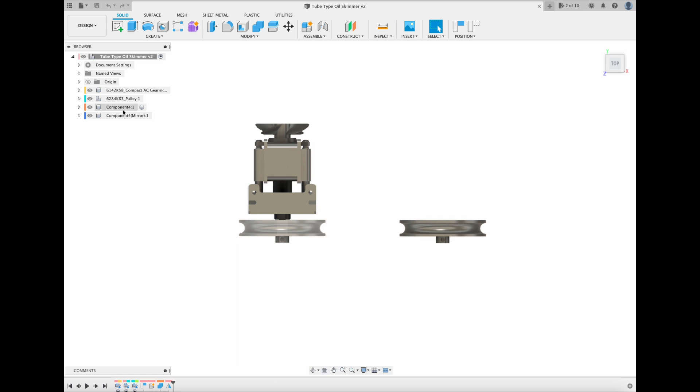I'm now going to make the mounting plate. Using the move command that you see up there in the top of the toolbar or the ribbon. There, I'm moving it into place where I want it. Wow. And it's a good idea to save your work as you go.

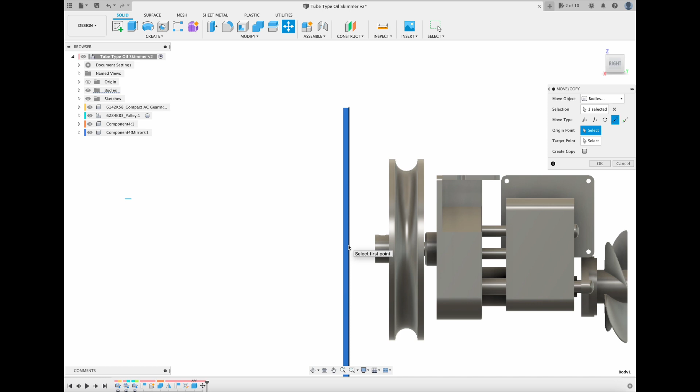Great thing about Fusion 360, you can drag and drop parts from McMaster-Carr.com, so you don't have to 3D model every single nut, bolt, screw, washer, etc. Wow. So you can see this shaft. I went on McMaster-Carr's website and basically downloaded the 3D CAD file from McMaster-Carr.com, and there's my shaft for my pulley. And then I can manipulate it in Fusion 360.

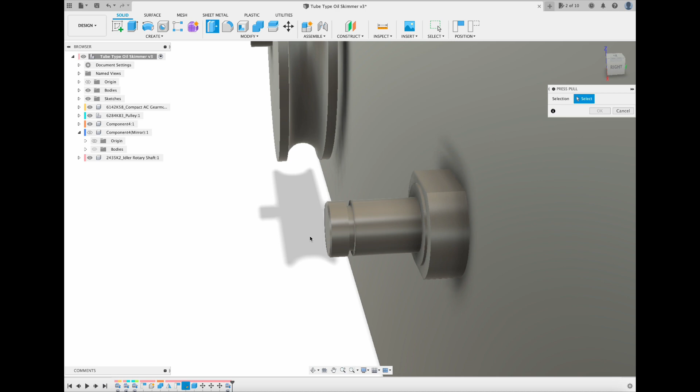So then in the render mode, we can add paint colors. I'm going to paint the different components different colors so they stand out better on screen. You can see that hole there is where a set screw would go.

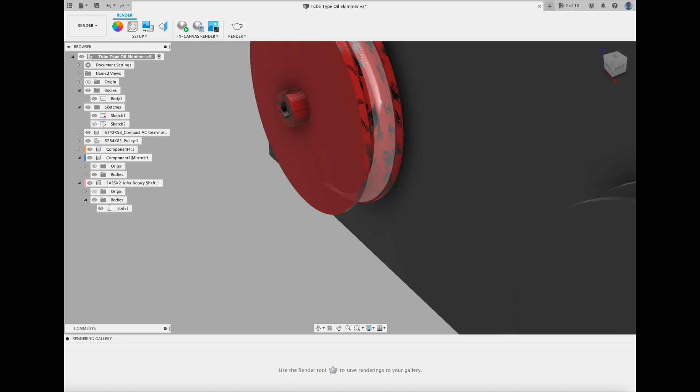Again, if you go up to that insert box, that drop-down menu has a direct link to McMaster-Carr, takes you right to McMaster-Carr's website. You can type in the search box whatever part you're trying to find, nut, bolt, washer, pulley, etc. So I found that really helps speed up my workflow when I'm 3D modeling a product.

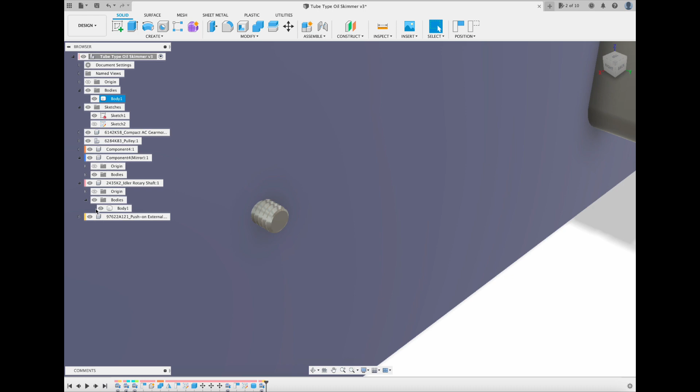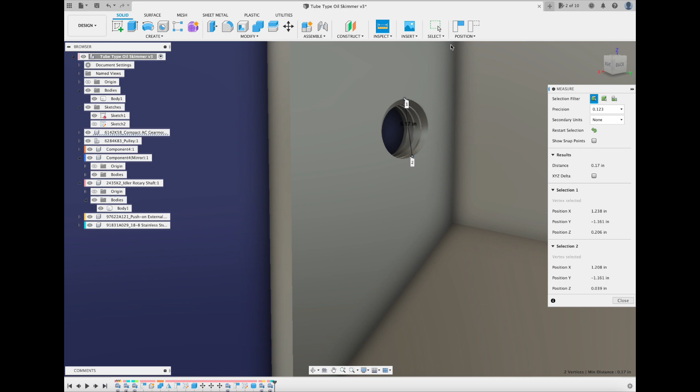You see, I add a retaining clip. I added a lock nut. Now I'm going to measure these holes and add some mounting bolts for that motor. And the hex bolts didn't work, so I'm going to use some cap head screws, some Allen bolts basically. Because it's tight tolerance on that motor mounting flange there.

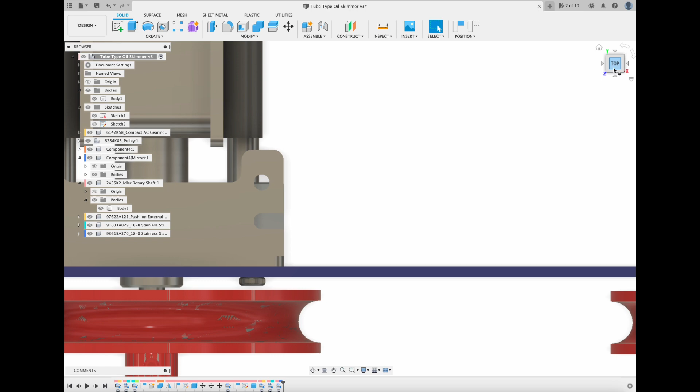And the great thing, once I drag and drop in one bolt from McMaster-Carr's website, I can use the mirror command to make 3 more bolts, or I can use the copy command to make 3 more bolts. And here's a better view of the drop-down menu. So you can see here, I made a copy of it.

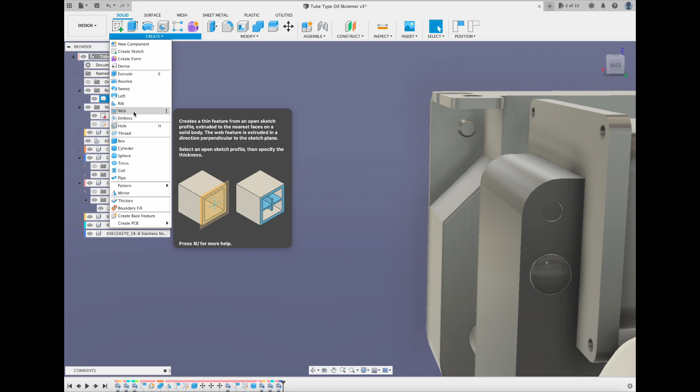I want to make a cover for this motor, so I simply hit the sketch command and made a sketch on the back of that mounting plate, drew a square, and then extruded the square out to the size I want. And I'm making another sketch on that plate that I just made, and I'll go up and use the extrude command on this to extrude it out to the size I want. You can see there's different options you have up here in the ribbon.

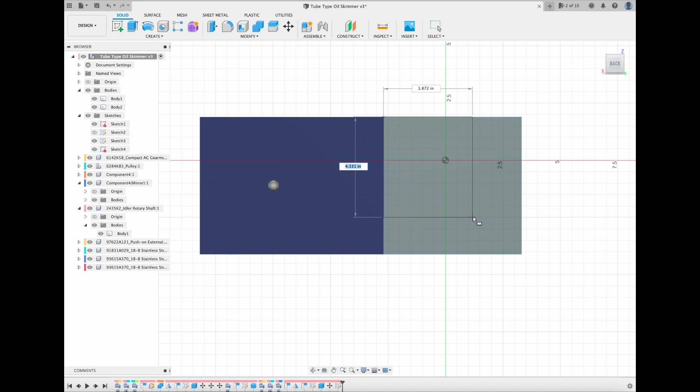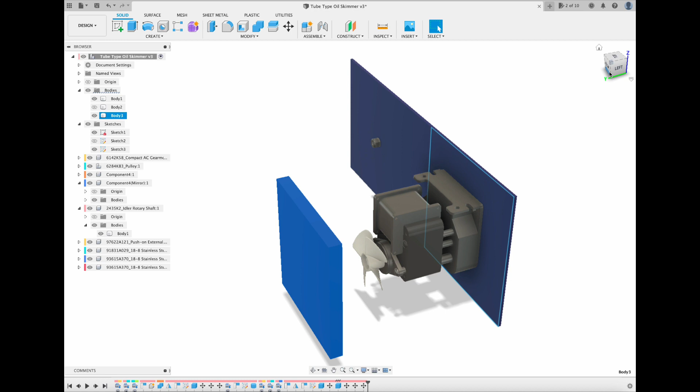The shell command is great. I'm going to use the shell command in a minute here to turn this solid 3D object into a shell, so it'll provide the cover for the motor. Woo! You can see I'm playing with the shell feature there.

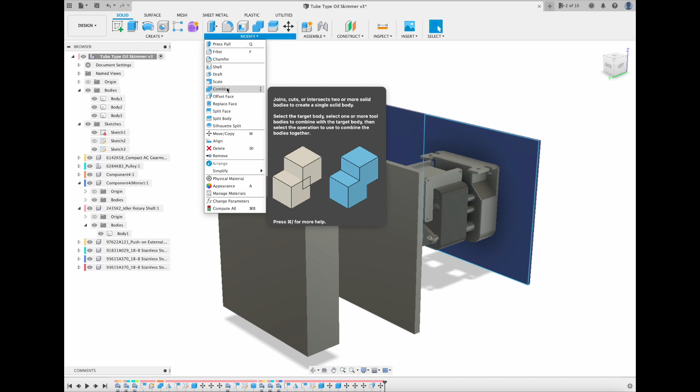Or you can drill a hole if you want a round hole instead of a square hole. But in this application, I do need it to be square. It needs to be a cube that's hollow. And I want the walls to be 1/8 inch thick. And there you go. There's the cover. Wow. And then I'm going to make a flange, a mounting flange, that'll weld to that motor cover. And then the mounting flange itself is going to be what bolts to the mounting plate.

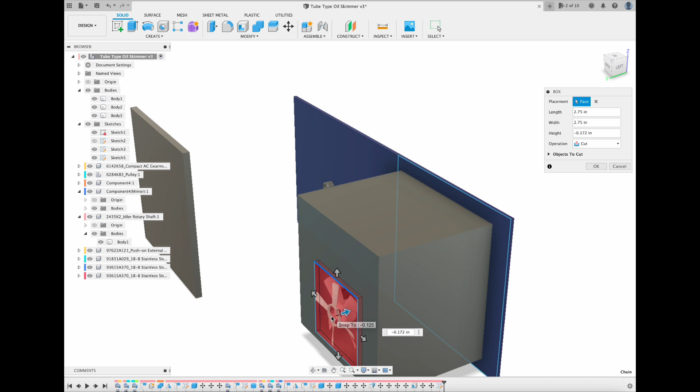And I want to add a weatherproof vent on the back of it. So I'm going to try some different size louvers, different vents from McMaster-Carr's website to see what fits good. So that way when it rains or they wash down the wash rack, you don't have to worry about getting water sprayed inside that electric gear motor.

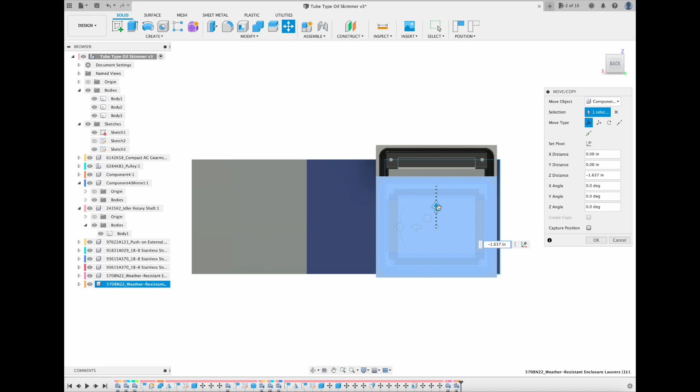And you can see you can rotate objects 360 degrees, move them up and down, left and right, get them where you want them, rotate them. I tried several different ones to see which one would work best.

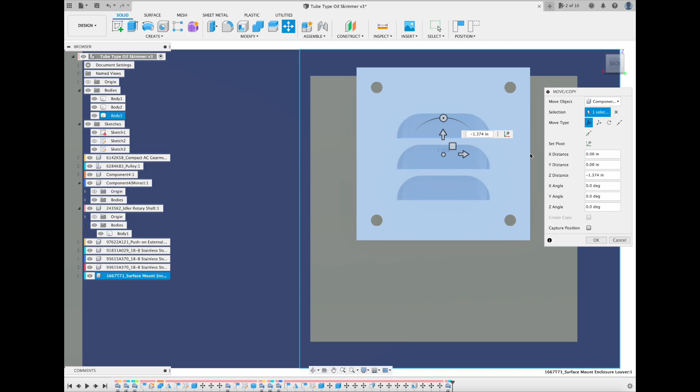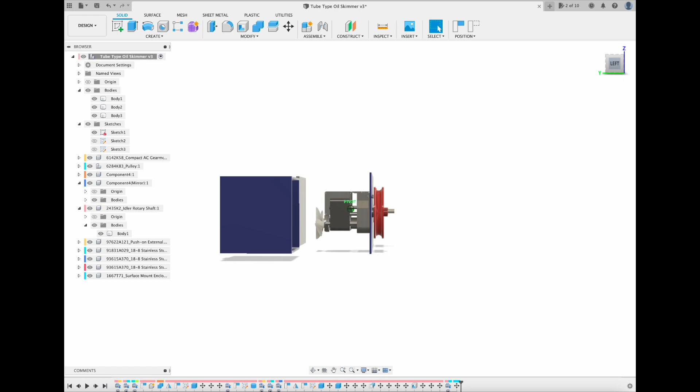And later on in this demonstration, I'll show you where I add some holes to the bottom of this motor cover box, so that way the cooling fan on the motor will suck air in on the backside, and then the warm air can be forced out some holes that I'm going to drill in the bottom of the cover. So I'm working on making an actual opening for the vent.

Now when you're 3D modeling, it's up to you how detailed you want to get. If it's just for looks, where you just want to capture the exterior look of the product, then you don't have to go through every detail of every single mounting hole, cutting out the opening like I did for the vent. Depends on your time constraints, your budget, what you're trying to accomplish.

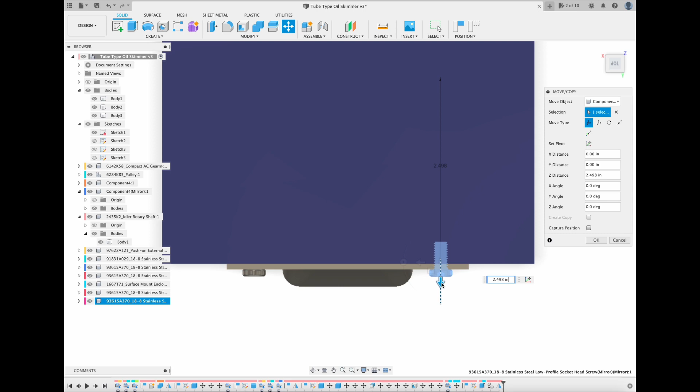And then again, using that extrude command, I did a cut. That's why you see that it turned red, and I removed material to make that flange. Woo!

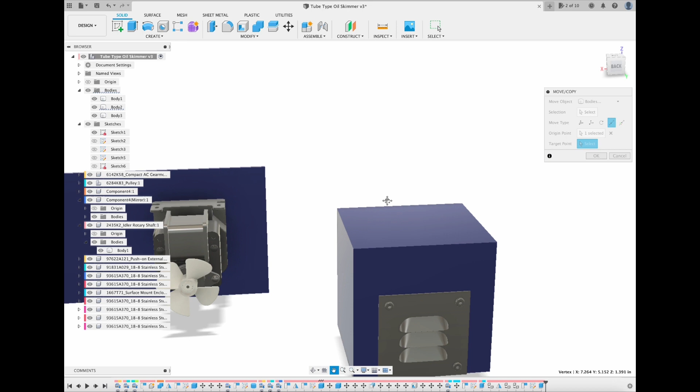And then up there in the design tab, you pull that menu down, and that's where you can go in. You can add color. And the render, got to click on render.

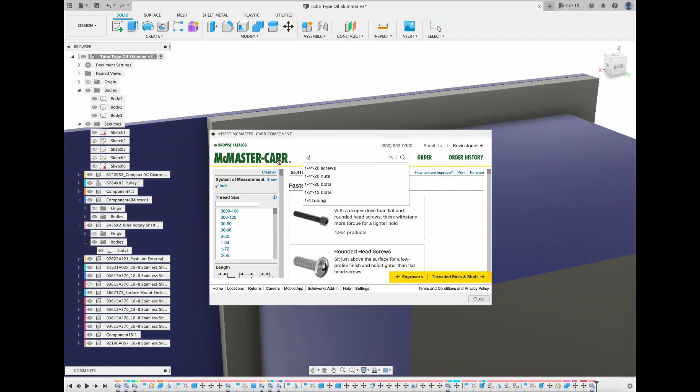So here again, I'm bringing in more parts from McMaster-Carr's website. Get some cap screws to mount this cover to that center plate, that mounting plate. And I would like 4 of these mounting screws, 1 on each corner. I'm happy with that.

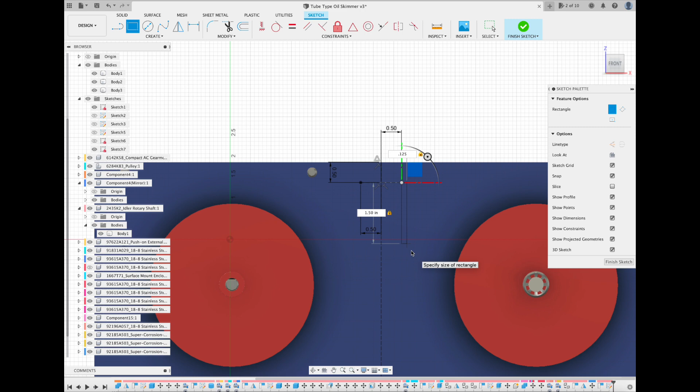And the great thing about that sketch command is you could pretty much draw a sketch on any plane, any face. You can draw hidden lines. So now I'm adding the scrapers where I want them on that mounting plate. The scrapers are going to be what scrapes the oil off the tube as it's pulled through the unit. So you did an extrude feature there, remove material.

So that's a top scraper. Need to make a bottom scraper. I'm simply going to make a copy. They're going to be offset from each other. So those two scrapers are what's going to, again, scrape the oil off of the tube as it travels through these rollers.

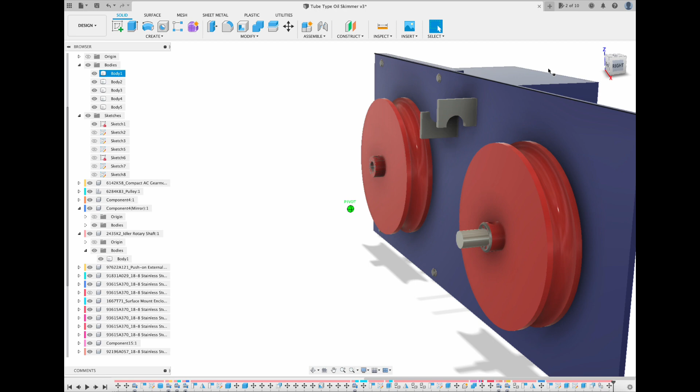And elongate these shafts and then move the pulleys out because I need to put some gears behind them. Specifically, I need a drive gear on the motor shaft. So I'm going to go to McMaster-Carr, find the gear I want, bring it in. It's an SAT file. So again, you can see I'm just going to manipulate these parts to get them aligned exactly where I want them to be.

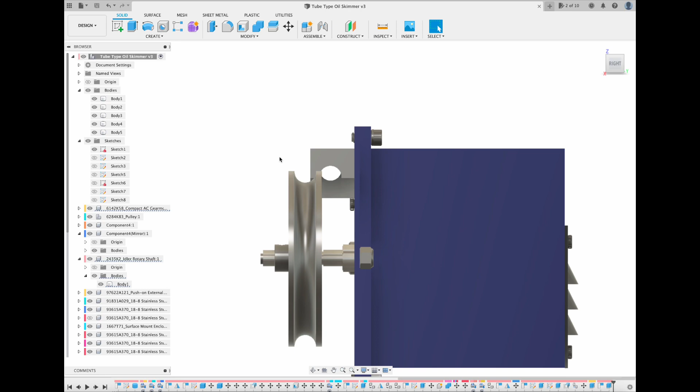Tried a few other gears that I wasn't happy with, so I'm going to stick with these gears that you see here. Just making sure my pulleys stay lined up and my tube scrapers stay lined up with the pulleys.

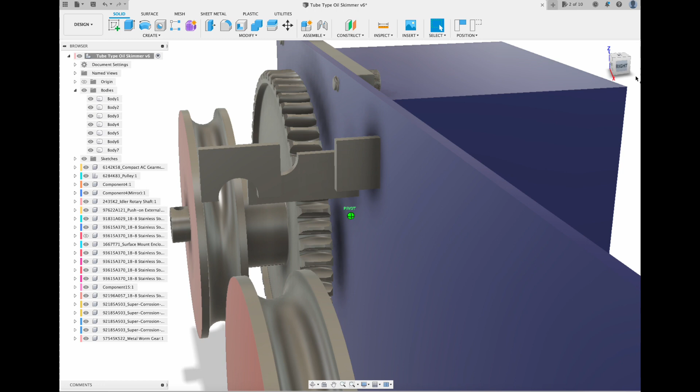And then I'm going to extend the side of this mounting plate out about 6 inches or so to make room for another large gear. And then there's going to be a tension wheel that's going to push on the tube. So as the motor turns the drive pulley, it's also going to turn the two gears.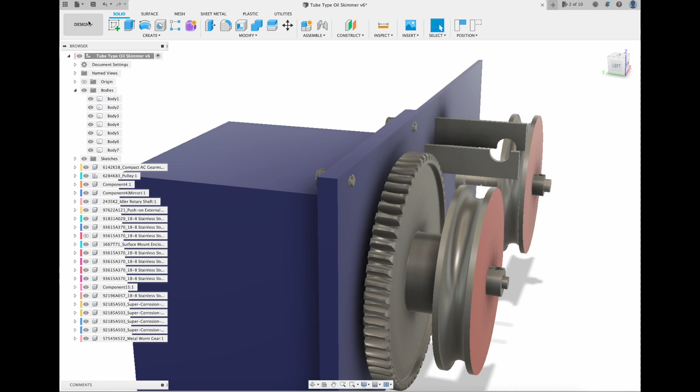And that second gear is going to turn the tension wheel, which is going to help keep pressure or tension on the tube so it can be pulled through the unit. Wow.

I also thought about using one of those adjustable pitch pulleys where you can make the notch wider or more narrow. But this seems to work fine. So there's my two gears.

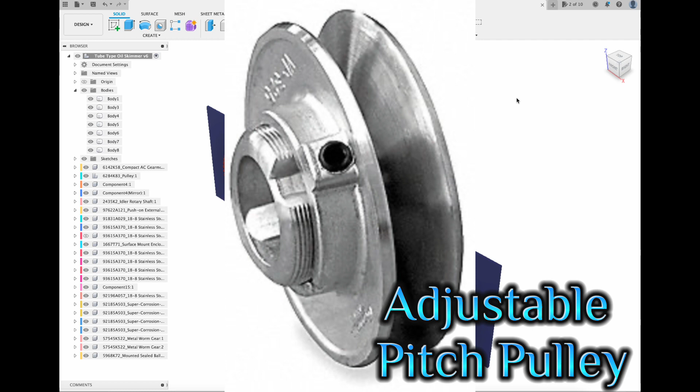I'm going to add a pillow bearing block here on the back. It's got a grease fitting, set screw, because that second gear is going to be able to free spin in the pillow bearing block, but it's going to be driven by the drive gear that's attached to the motor shaft, if that makes sense.

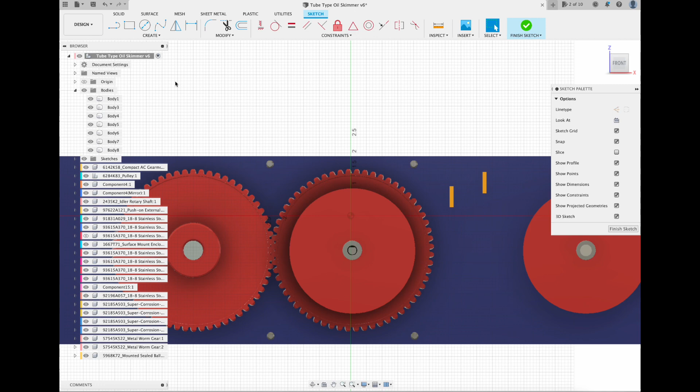So now I'm just doing another sketch, making my tension wheel. I'll extrude it out. I'm going to put a little bit of a bevel on both edges. Then I want a little bit of a collar on it where we can install a set screw. And the set screw will be how it attaches to the shaft.

So that gear is going to turn the shaft. At the same time, it'll turn that tension wheel. Just trying to clean up the bore, the inner diameter there. See, I made it too large.

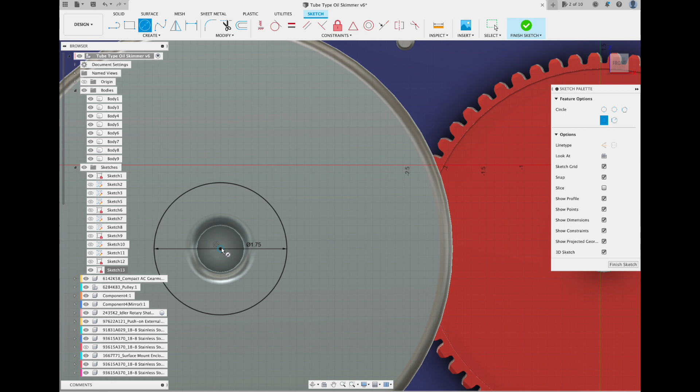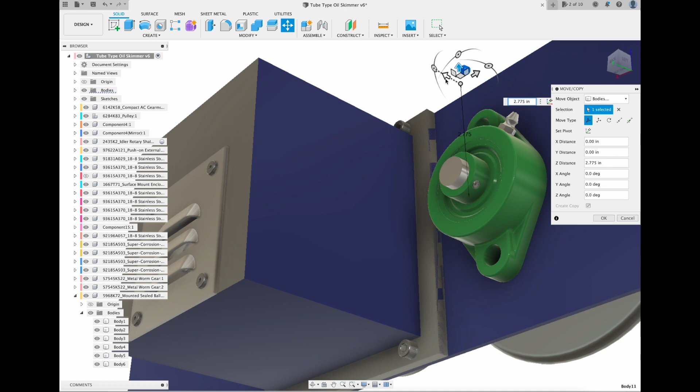So I'm just going to copy that existing set screw and bring it over and place it where I want it. And again, for a 3D model purpose, that's good enough for me. I don't need to make a hole all the way through to the shaft, make a longer set screw and waste time doing that. This illustrates the idea well enough. And then I painted it yellow to make it stand out and obvious what component it is.

Now we need to add some mounting bolts for the pillow bearing block. And then I'm going to slot this mounting plate after I get the bolts placed. So that way when you install the tube, you can loosen those mounting bolts. And you can see I'm doing my sketch now for the slots and the mounting plate.

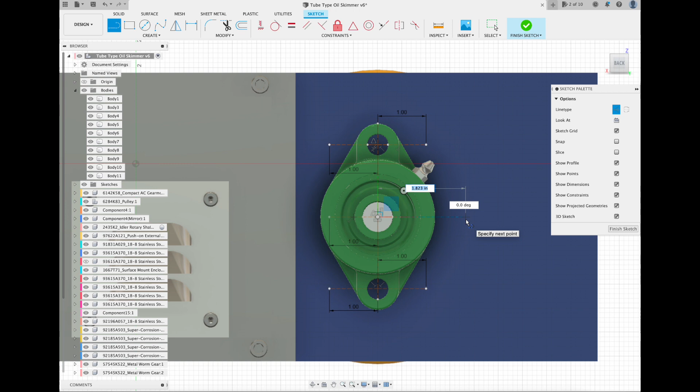And that way you can slide that pillow bearing block side to side a little bit to make it easier to install the tube over the pulleys. So you can see we now have some wiggle room side to side. Woo!

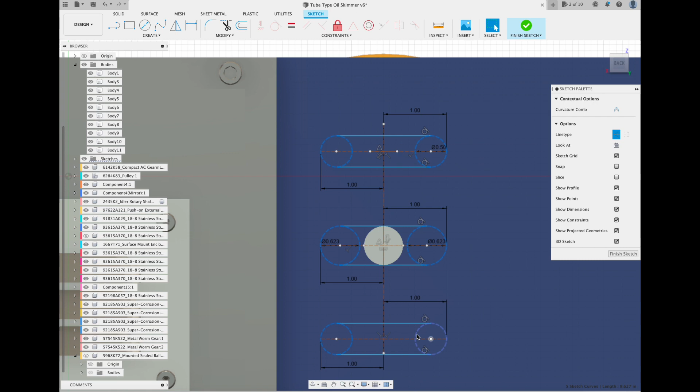So I'm going to go find the hardware that I want. And I'm going to use T-nuts because they're going to be low profile and they'll fit in those slots nicely. So we'll place the cap screws first. And there's the T-nuts.

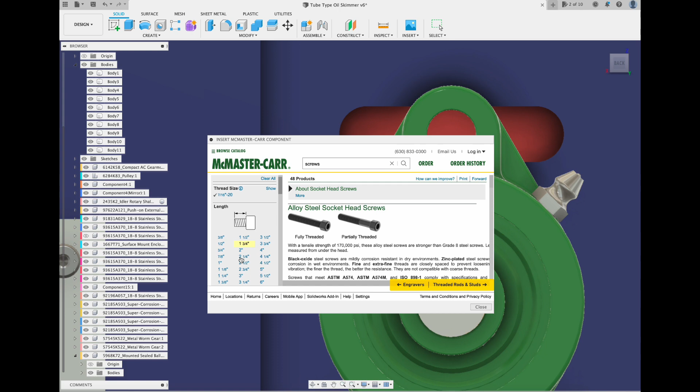And I machined off just a tiny bit of material because they were slightly too wide. Just simply use the push-pull feature to do that. And I'm going to rotate it around so it's properly orientated in the slot.

And when I'm happy with it, I'll simply make a copy of that one and drag the copy down to meet up with the other cap screw. You can see I still have plenty of clearance for the gears. Nothing's hitting.

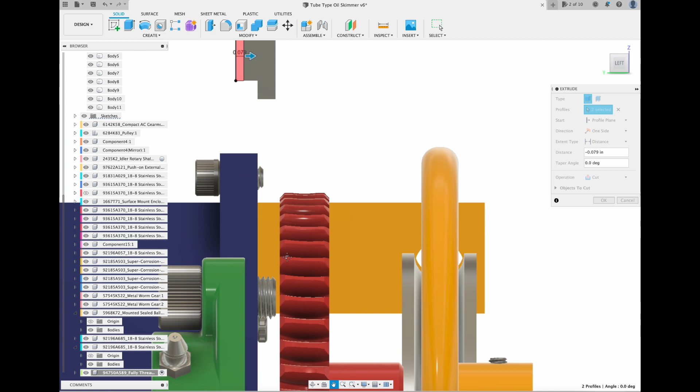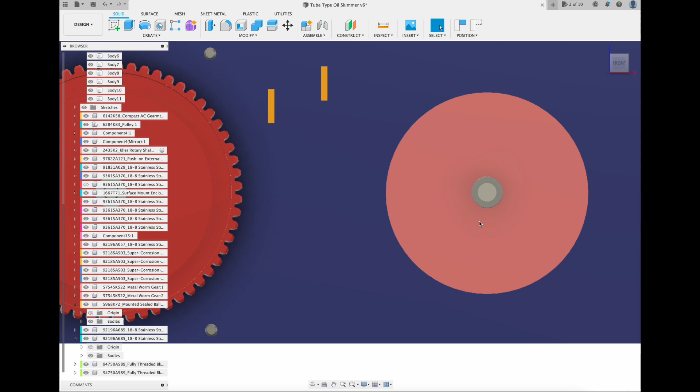I want to make that idler pulley much smaller, so I'm looking through McMaster-Carr's website to bring in a smaller pulley. I don't want the tube, coated with tramp oil as it comes up out of the water, to have a lot of surface area or contact area on that idler pulley. By using a smaller idler pulley, it'll have less contact area, so more of the oil will stay on the tube and get scraped off on the scrapers.

So now it's starting to come together.

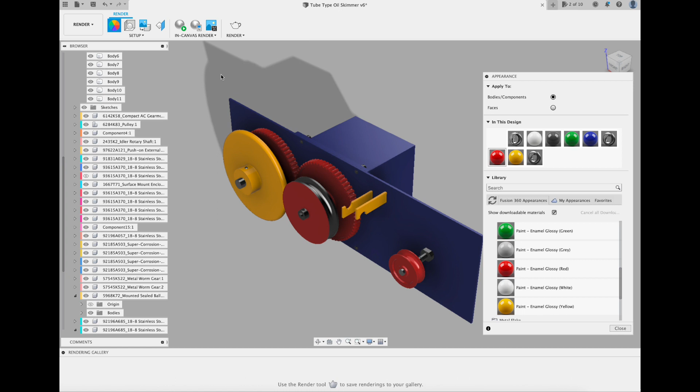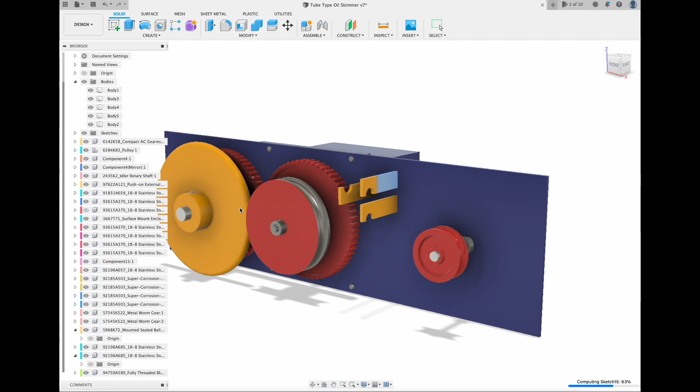That little red idler pulley just free spins on the shaft, it's not driven. I'm just repositioning the scrapers to a better location. Yeah, that looks better.

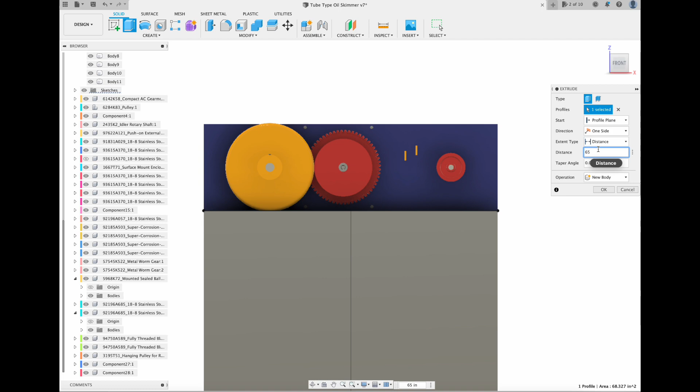Now I'm going to do a sketch and make the drain pan, or the triangular shaped trough, that's going to catch the oil scraped off of the tube. The drain pan will have a pipe fitting welded to it, and a hose or pipe will extend to a 5-gallon bucket or 55-gallon drum, etc., to collect the oil. So here I'm doing my sketch, getting my profile where I want it.

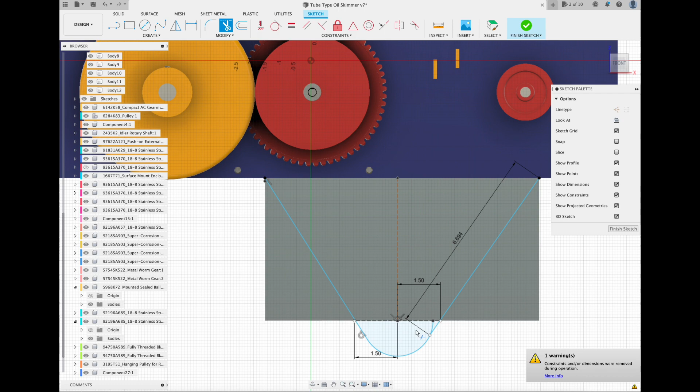I'm simply removing material where I don't want it, and then I'll use the shell command in a minute to make an open cavity. There you go, there's your drain trough. Now I'll make a hole in the bottom on the back side, and that will be where we weld our 90-degree pipe elbow in place.

Again, I don't have to draw the elbow, I can simply go to McMaster-Carr's website and bring one in to my 3D model, saving time. I'm going to do a reducer elbow, so we're going from 1.5 to 1 inch.

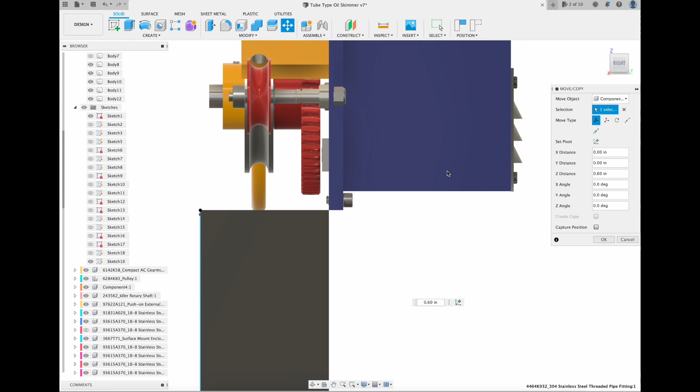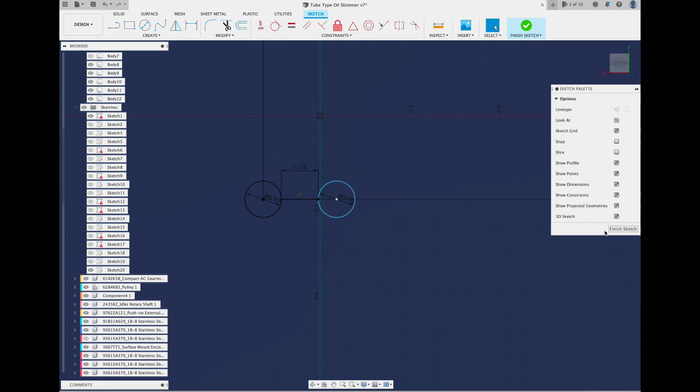Now I'm doing a sketch on the bottom of the motor cover, or housing, and I did a pattern of holes. Now I'm going to remove material, essentially drill out material, and there you go, that's the exhaust vent on the bottom of the motor cover, so we can keep that motor cool.

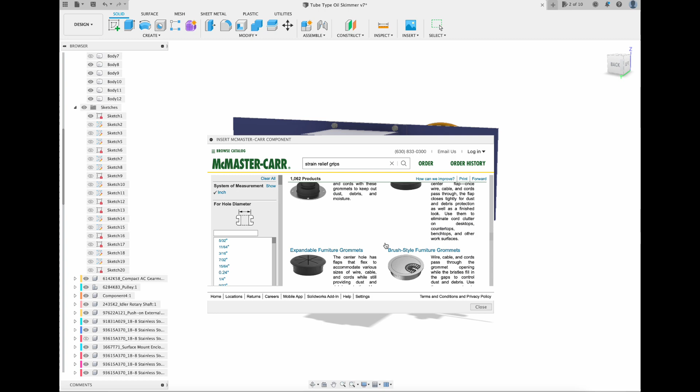Now I'm adding a strain relief for the power cord, of course a weatherproof strain relief. Then we'll add a toggle switch, an on/off toggle switch, for a 120 volt AC circuit. Again, this is a weatherproof toggle switch. Just placing it where I want it, rendering it. There you go, and again, saving as I go along.

I'm pretty happy with that.

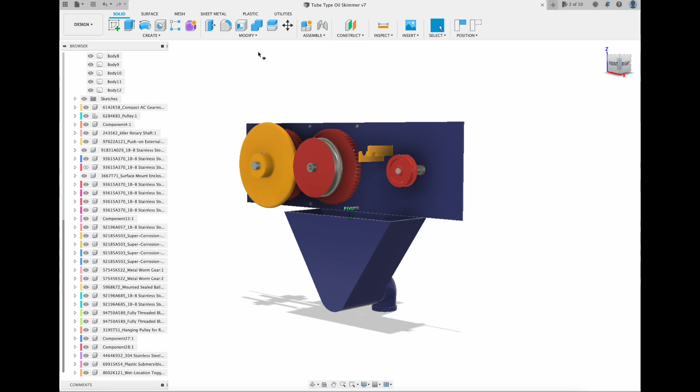So the next couple steps on this project, we need to make a cover to go over all the pulleys, to keep the rainwater, dust, dirt, and hands out of there. So again, make a sketch on the base plate, make a new body. It's a rectangular body, as you see.

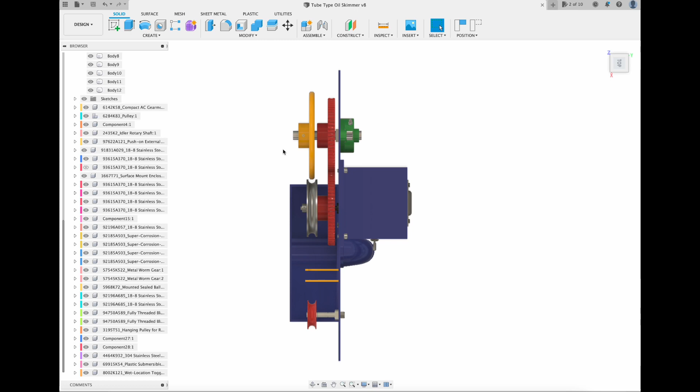Making sure we have adequate clearance for all of our components inside there. We do. And the bottom's going to stay open, of course, because we have to allow the tube to go up inside and then exit. So I'm doing the shell command, doing a draw to make the mounting flange.

So this cover is going to bolt to that center mounting plate. Paint it blue. And again, I'm just going to copy the existing cap screws, and do that in all four corners. And there's your cover. Woo!

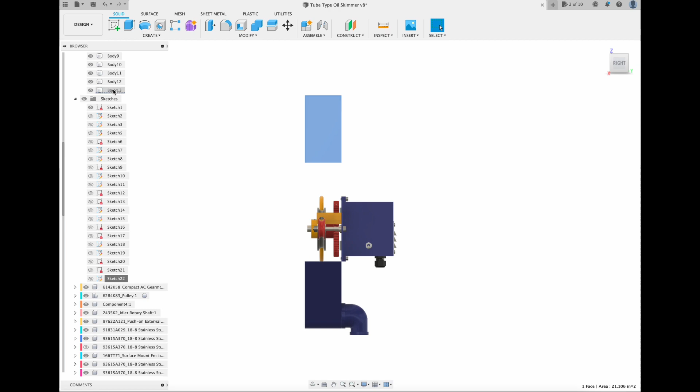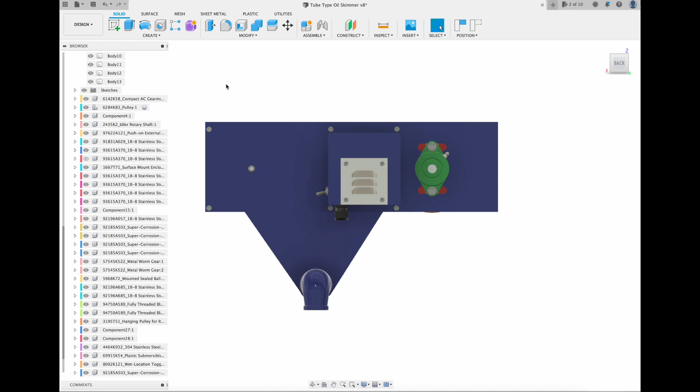I'm pretty happy with that. So next, I want to put a safety decal on the front of this cover to warn people, don't stick your hands in there, it's a hazard, a crush hazard. So I'm going to simply add a decal, and you can manipulate the decal, rotate it around, adjust the opacity, and place it where you want it. And there's your sticker or your decal.

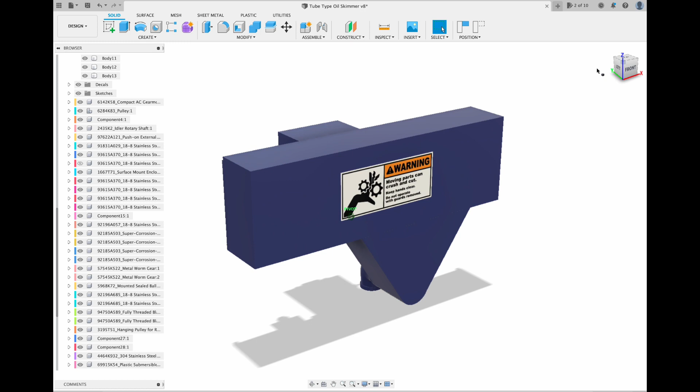And then we'll also show you how to add text, embossed text in this case. So I'll make an embossed label using the text command, and it's going to say oil skimmer, just to give you an example here. So you can see there's text, you click and drag and essentially make a little rectangle, type the text that you want it to say, and make it bold. And then when you're happy with it, hit OK.

Over in my browser, I'm going to select each and every letter, and then extrude those letters out by about 1/8 of an inch.

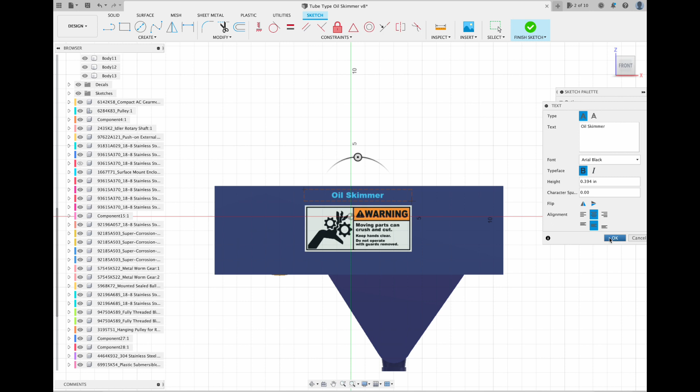And there you go, you can see those letters are three-dimensional now. Wow, they stick out from the surface. Then we'll go back into render and change the color of those letters, turn them yellow, just drag and drop the color, then back into design mode.

The next step, we need to weld some square tubing, 1.5 inch square tubing, to make legs and a mounting plate so you can bolt this to the concrete. So again I do another sketch on the surface, getting ready to make my 1.5 inch square tubing. I make one, and then I simply copy it to make the second one. So now I've got my two legs.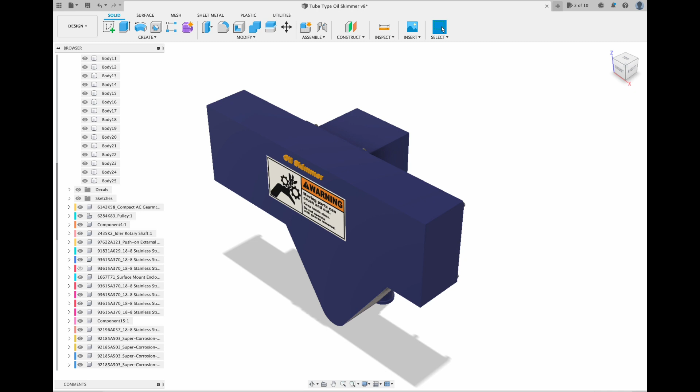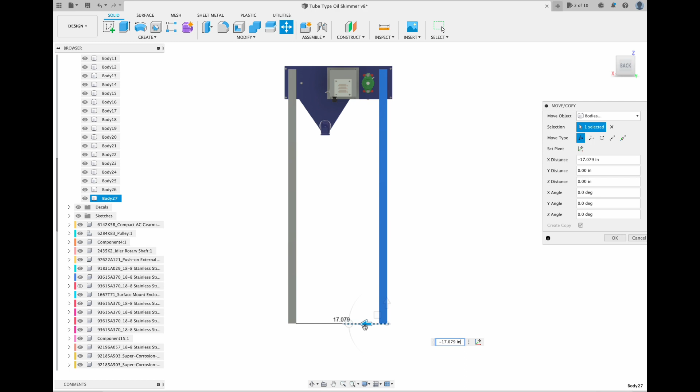There you go, and on the bottom I'll make a sketch on the bottom of one of those legs and make our mounting plate or base plate where it'll bolt to the concrete. Then we'll add some mounting holes as well for some 3/8 concrete anchors, and then we'll paint it blue.

So again, I'm doing another sketch now on the top side of the mounting plate, working out where I want to position my mounting holes. I'm also making some triangular shaped gussets to add extra support and rigidity to those square tube legs, and I'll simply copy that gusset and move the second copy over to the other leg, and there's your gussets.

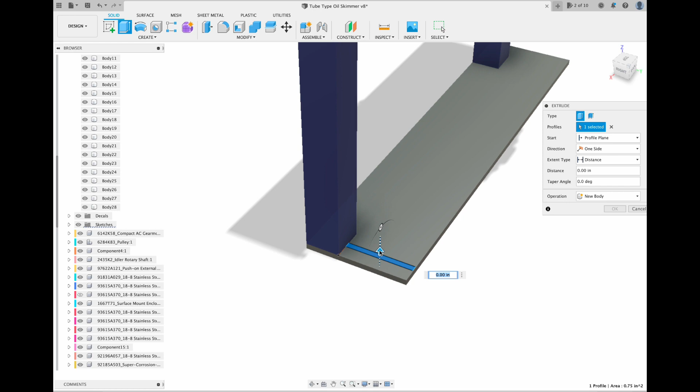And paint those in the render. You can see I need to move that base plate over, it's slightly offset. So I'm going to move the base plate over, and I'm also going to get my holes made in this plate.

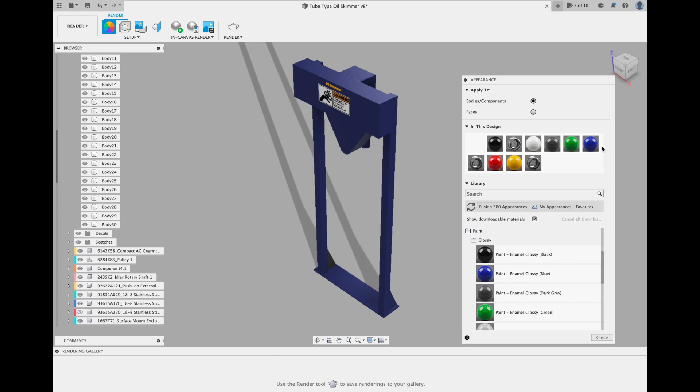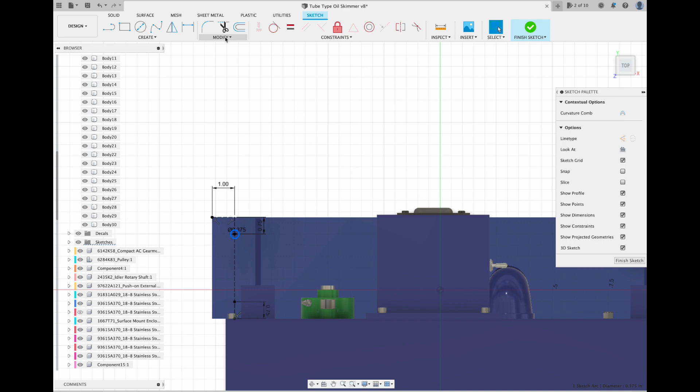So again, you can see it's still in sketch mode there when you see the grid lines. There, I'm moving the plate over, now it's centered. So now I'm going to edit my sketch. Yeah, see we're in sketch mode, you can see the light gray grid lines, that's how you can tell you're in sketch mode.

And so we'll add our 4 mounting holes, 3/8 diameter. Then the same thing, we'll go back to design mode, extrude the holes out and then remove material. We're actually cutting out material. So if you pull the arrow one way, it adds material, you pull the arrow the other way, it removes material. Yeah, that looks good, I'm happy with that.

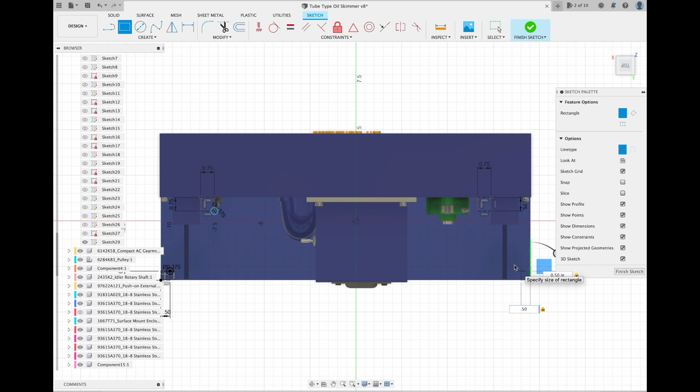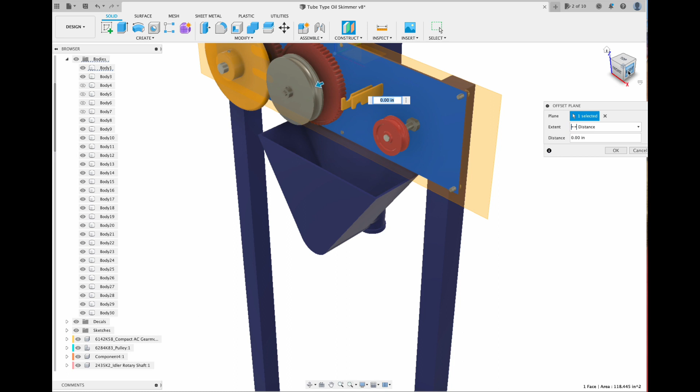So now I'm creating a plane, an offset plane that's aligned with my pulleys, and on that offset plane I'm going to do a sketch. I'm simply going to make some lines and some arcs to trace out the path of where I want the rubber tube or the acrylic tube to go through the pulleys and through the scrapers.

And then we'll use the pipe command to make a half-inch flexible tubing. So you can see I'm just routing it around in sketch mode, and get the idea, just make sure all your line points connect.

And then I'm going to remove, see there's a circle there, I'm going to remove some of that, because I just want the arc, I don't want the whole circle. I'm going to manipulate that point so it lines up with that scraper. Yep.

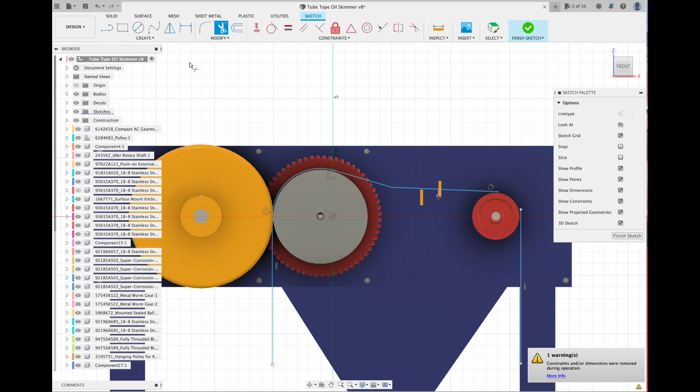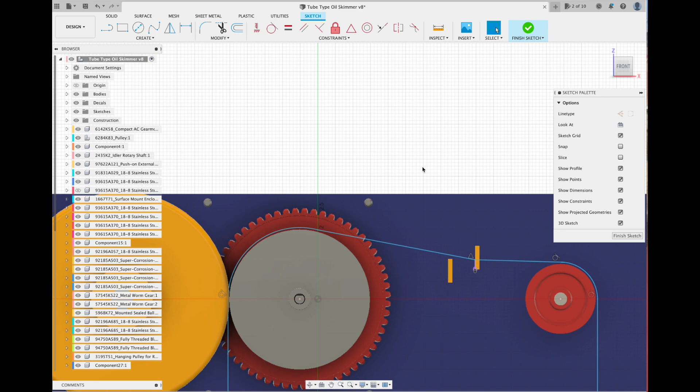And there it is, then go to create, click on pipe, and then click on each line segment. It automatically starts to create a pipe that follows your line. I'm going to set the size to 1/2 inch, make it hollow, tell it 1/8 inch thick wall.

And there's our tubing. Then I'll go into render and select a material that's translucent or transparent to more accurately reflect tubing. So again, just start with the lines, and then the pipe, when you make the pipe, it's going to follow those lines you add, if that makes sense.

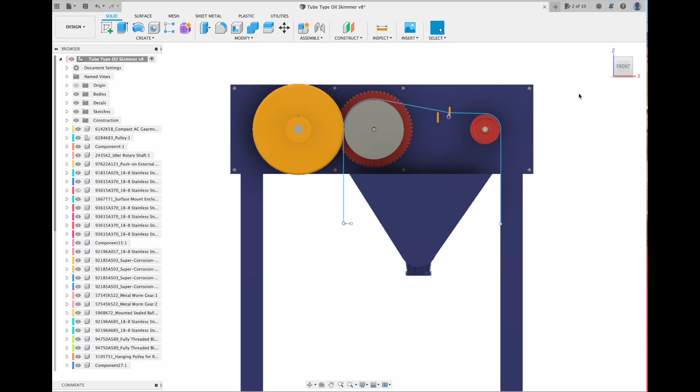Again, back to the pipe command, do it again, you see how that works. Set the size or the diameter, hit OK. And then in render you can go through, you see you've got different materials, and different materials will have different textures, to mimic that real life look of some flexible translucent tubing.

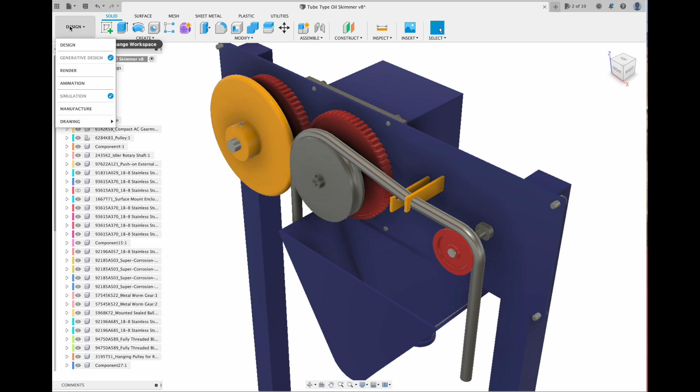And there we go, and I want to extend the tubing down a little bit more just for good measure to make it clear. I'm just manipulating the scrapers so they scrape the top and bottom of the tubes properly. Right about there, looks good. Yeah, I'm happy with that.

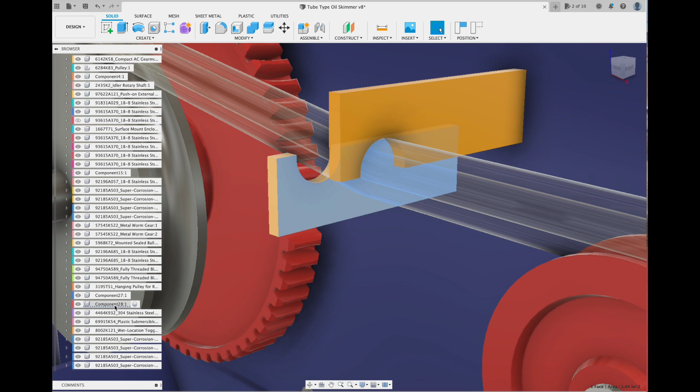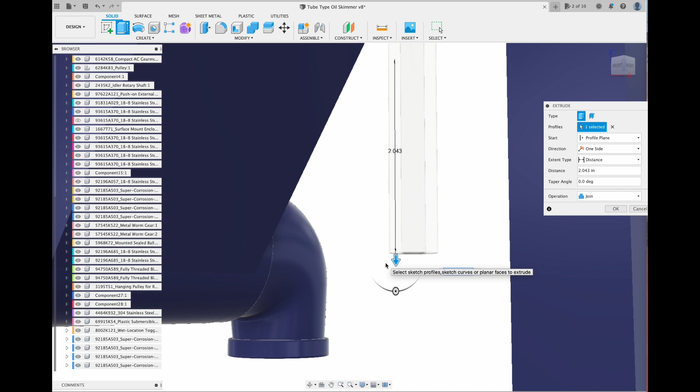So then I just click on that bottom face right there, and then I'll extrude it down to make it longer. I'll do the same thing on the other side. There's a cover, everything looks good, I'm happy with that. And there's our oil skimmer.